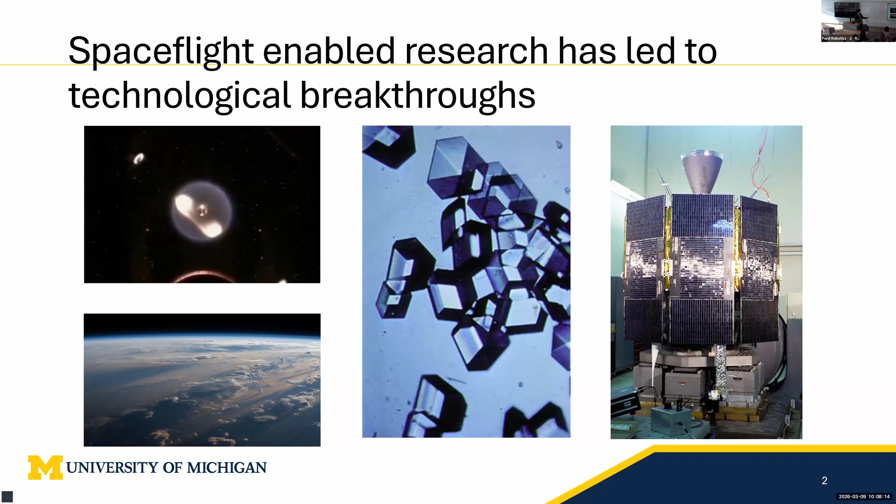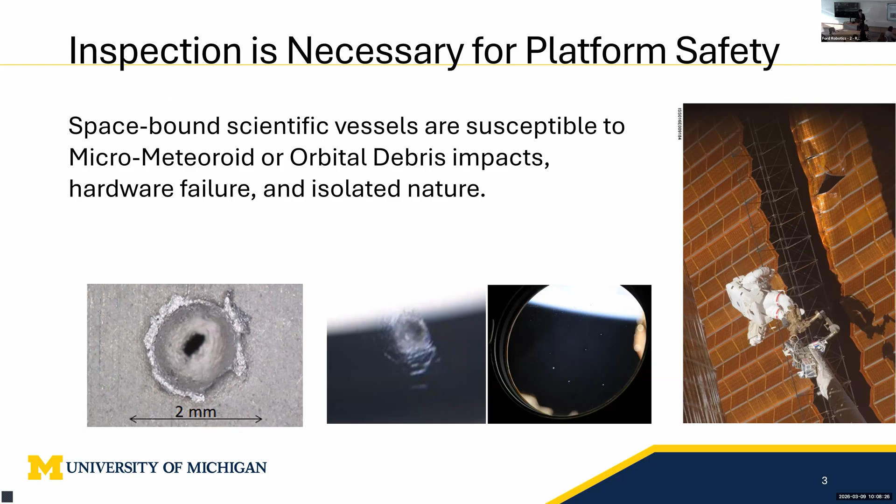All of these would not have been possible without spaceflight, which relies on space vehicles like the International Space Station or satellites like GPS satellites. Space vehicles that support these breakthroughs require inspection and maintenance because of the risk of micrometeoroid or orbital debris impacts, hardware failure, and also just the isolated nature of space.

Current inspection practices, including exterior cameras, line of sight through the windows, and manipulators, all have blind spots. You can see an example of that on the right; the shaded brown regions are blind spots. So inspection thoroughness actually requires spacewalks, which is a risk to astronaut safety.

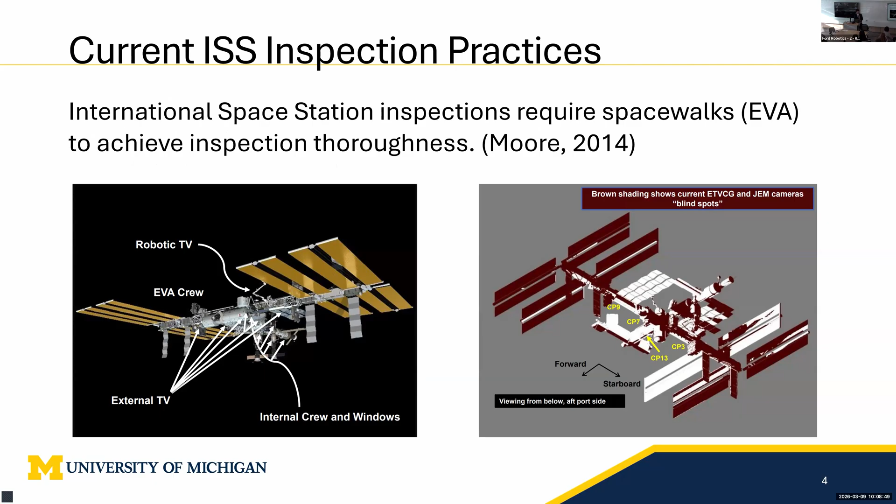One way that NASA performs risk analysis is by ranking events by criticality. Criticality is a combination of probability and consequence scales, and the highest criticality events have the highest probability and highest consequence scale. Any events in the yellow or red squares are high priority.

Spacewalk inspections for damage detection often show up in the bottom right-hand corner: low probability but high consequence events. But this risks astronaut safety. So we ask the question: can we mitigate these low probability and high consequence events using a space robot instead?

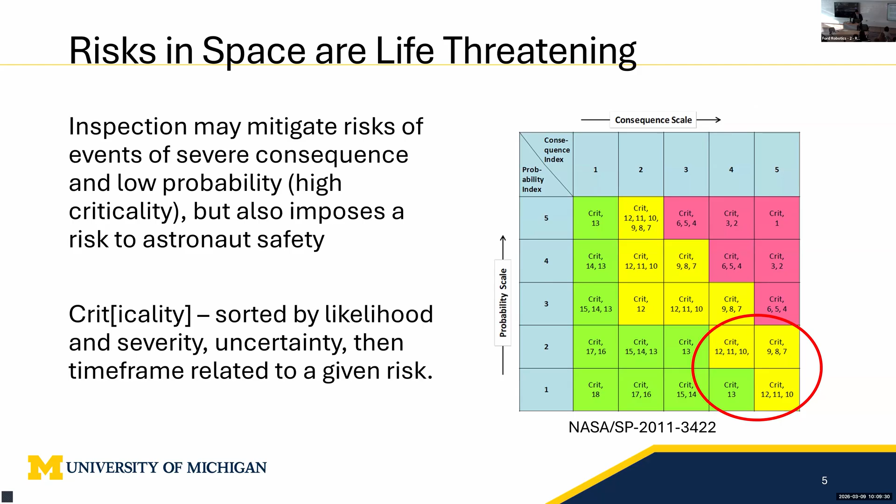Free-flying robotic inspection of the International Space Station can enable the inspection of these blind spots. But current approaches don't optimize for fuel consumption, information gain, or are limited to rendezvous docking scenarios.

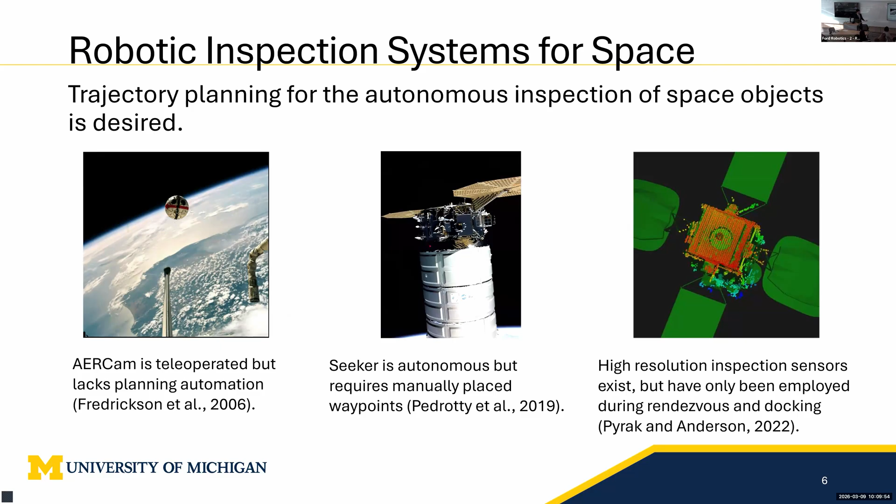Generalized inspections for proximity operations require very complex collision avoidance constraints and are not quite this simple. We also shouldn't automate every part of the inspection.

Perception algorithms for anomaly detection might propose spurious false positives, shown on the left, or do not identify untrained edge cases, like cables being identified as cracks on the right. So the segmentation task is not perfect, and identifying anomalies is even harder. So like astronaut spacewalks, we still need a human in the loop who will help identify anomalies.

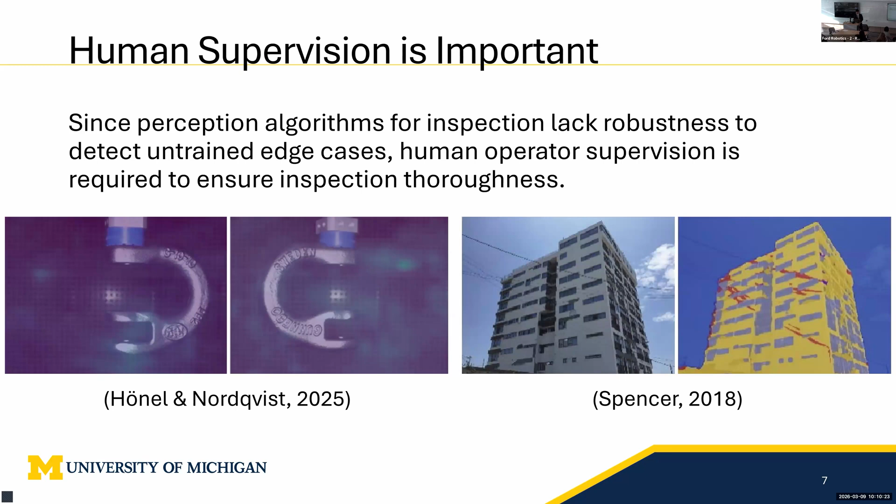This is my problem statement slide, and I'm making two key points: one, that robotic space inspection of the space station can reduce astronaut risk; two, that the system must integrate human supervision when possible for identifying anomalies. So how might we incorporate automation that optimizes for fuel consumption and information gain while also integrating a human in the loop to provide anomaly detection capabilities?

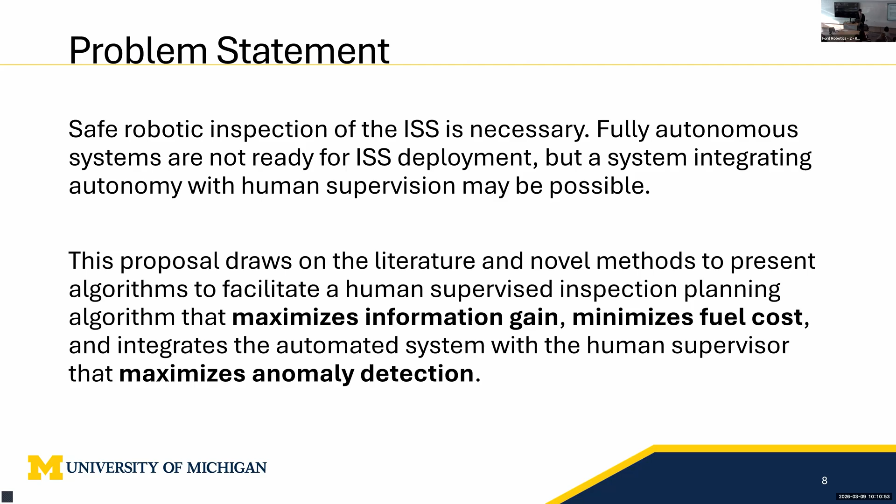Our approach begins by adapting a point-to-point robotic path planner to zero-gravity environments. Then we adapt terrestrial inspection algorithms to an in-orbit space station environment in a way that integrates results from the point-to-point planner we've already adapted. Finally, we integrate a human into the loop for anomaly detection and perform evaluations on that system.

My work makes a couple of assumptions. We assume that the inspector has perfect control, has perfect localization, and is a point mass, convenient. We assume that all the obstacles are static and known. We also assume linearized Clohessy-Wiltshire dynamics to describe the motion of the space robot.

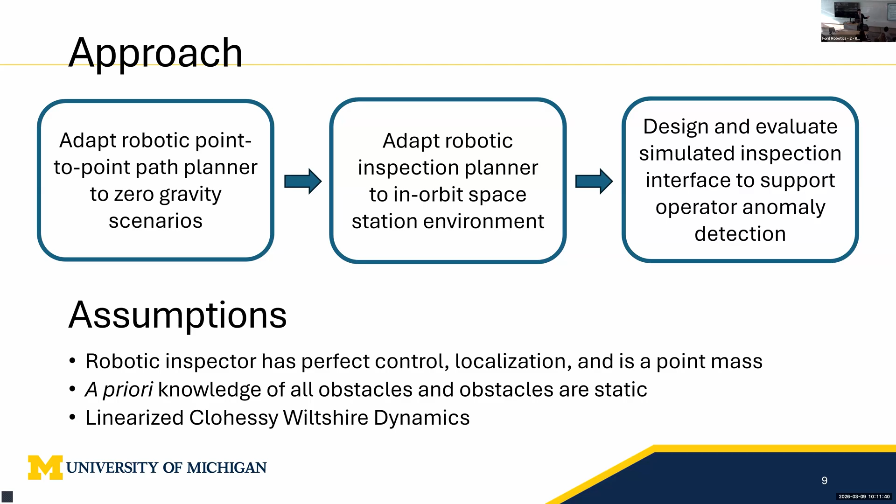This outline describes the structure of the rest of my presentation. I'll be coming back to this, but we'll start with the literature review of the gaps, beginning with a focus on terrestrial inspection algorithms.

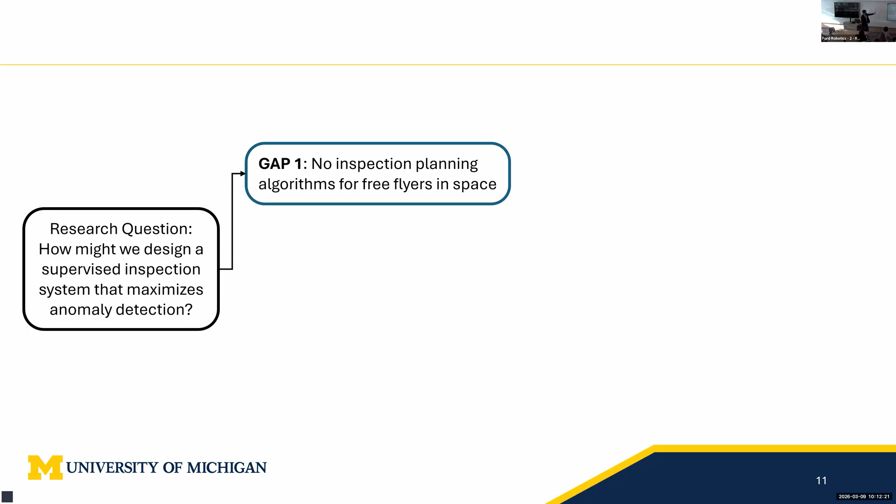So to answer this research question we posed earlier, we begin with our first gap. I stated briefly earlier that there aren't any inspection planning algorithms for free flyers in space that maximize information gain, minimize fuel consumption, while also integrating a human into the loop. This gap reflects that. I'll return to this slide and build out a flow chart that connects the research question to gaps, as well as aims, which correspond to chapters in my thesis.

The problem we're focusing on is generating a trajectory with minimal fuel cost while also maximizing inspection coverage. This comes with two challenges. First, each of these objectives is very nonlinear when considering occlusions, collision avoidance, complex geometry, and robot dynamics. Secondly, these objectives directly compete with one another. If we reduce the fuel cost of a trajectory, we might have to sacrifice some inspection coverage, and if we increase the inspection coverage, we'll probably be sacrificing fuel consumption.

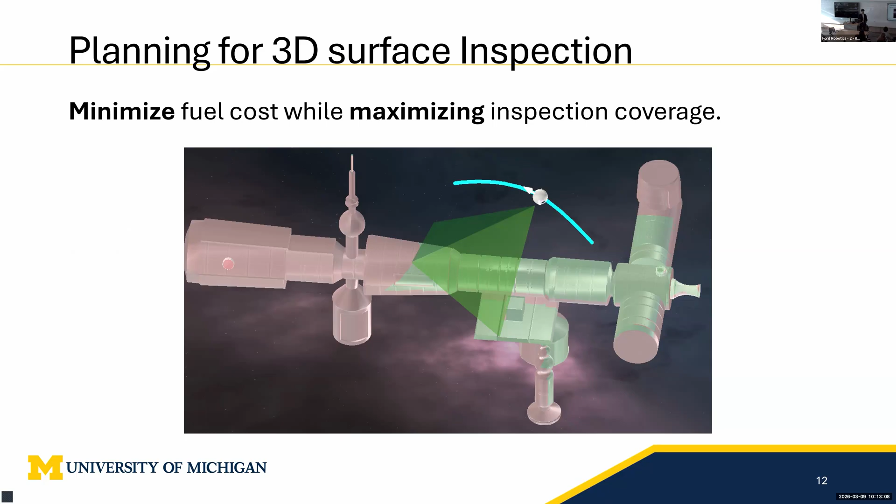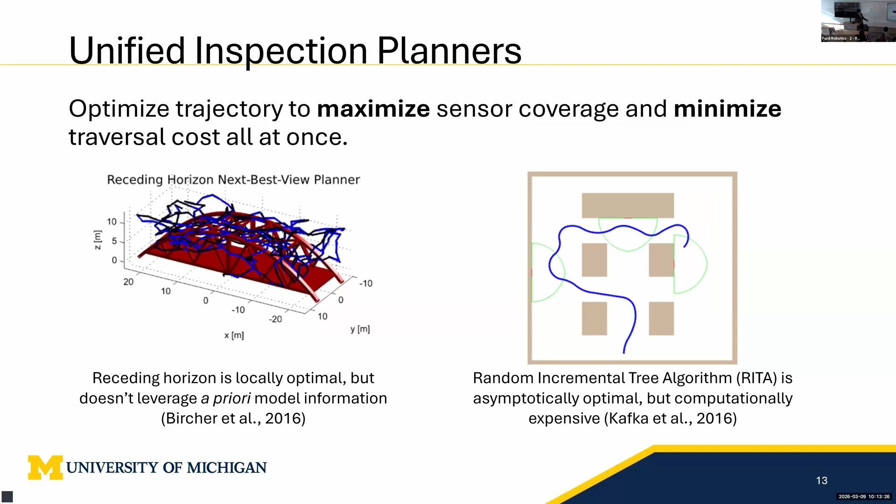This leads to two classes of planner: a unified planner and a decoupled planner. Unified planners optimize sensor coverage and traversal cost jointly. This operation is very high cost, and solutions are usually limited to a receding horizon planner, as you can see on the left, or a low dimensional or simplified planning space on the right. Both unified and decoupled approaches somehow discretize the solution space, but when you decouple the problem and provide an optimal solution to each subproblem, we can provide a great balance between discretization and optimal solution potential.

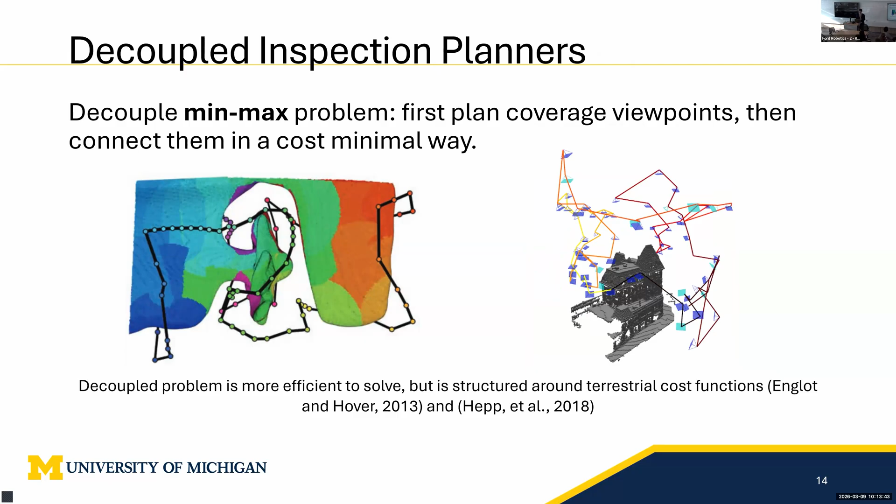This leads me to my first aim, which is adapting terrestrial inspection algorithms to space while accounting for orbital dynamics.

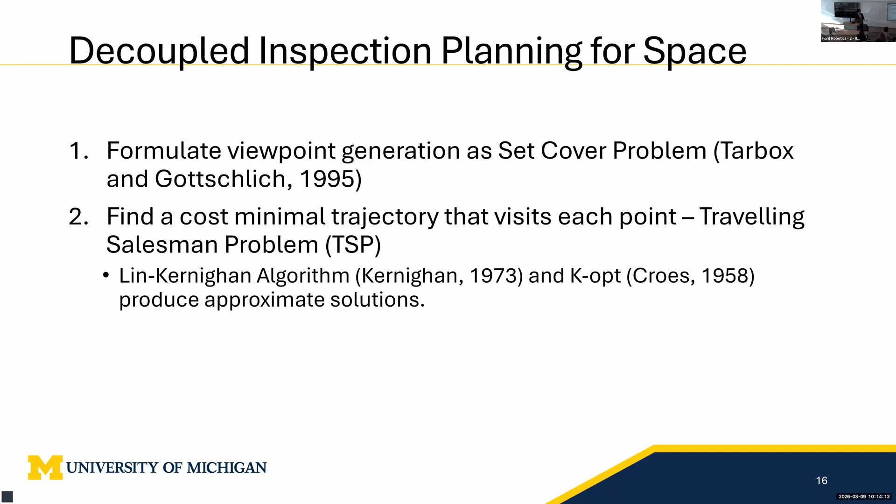Returning to the decoupled inspection problem, a generalization first solves the set cover problem, which is a formulation of the viewpoint planning problem, then adapts the viewpoint, then solves for a cost minimal trajectory that visits all the viewpoints using the traveling salesman problem. However, this leads to a non-metric traveling salesman problem, where we need to incorporate frictionless dynamics while avoiding obstacles.

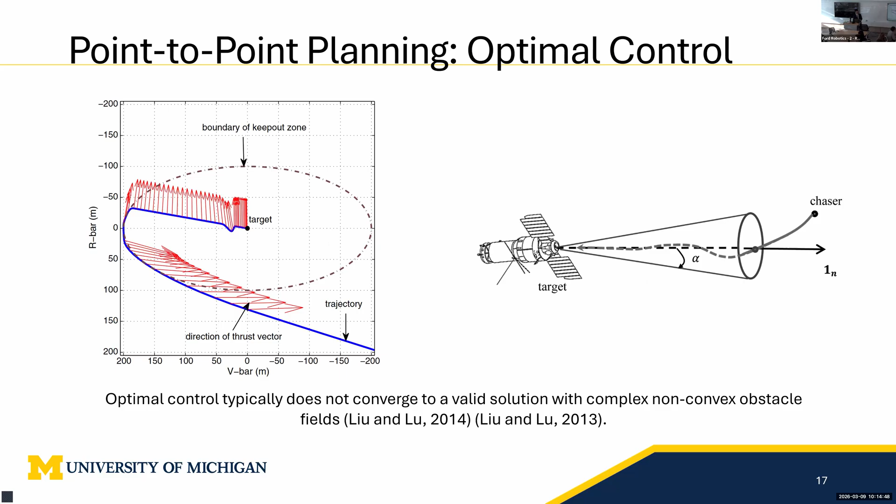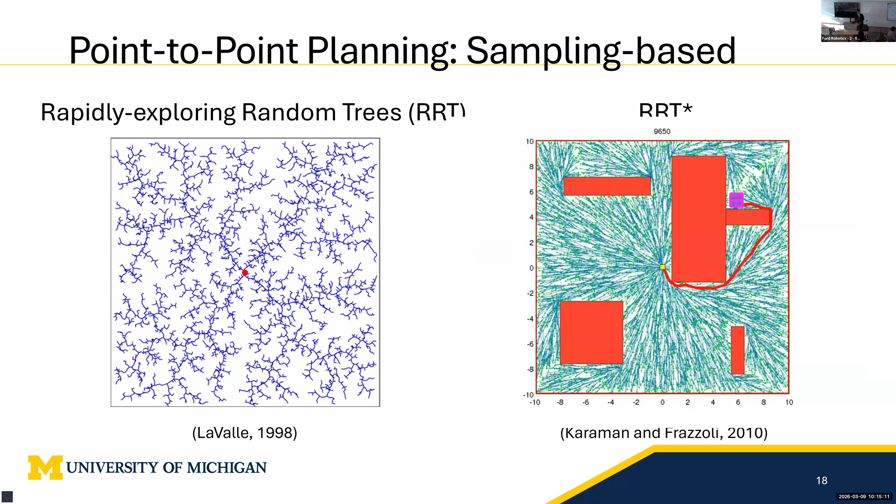Optimal control can be used to find solutions to these complex space planning problems, but they often struggle to converge to a valid solution given complex and non-convex obstacle fields. Sampling-based robotic path planners, on the other hand, like rapidly exploring random trees, also known as RRT, find solutions by expanding through free space with collision-free edges to find a path from a start configuration to a goal configuration. This leads to our first sub-aim, aim 1A: adapting point-to-point robotic path planners to the space environment.

Returning to this decoupled inspection planning slide, once we have our set of ordered viewpoints that the traveling salesman problem gives us, we have to perform one more step. In terrestrial inspection, a quadcopter can follow a set of ordered viewpoints easily because it's cheap to stop, hover, and take a picture. But in space, we have very high velocity nulling costs when we introduce orbital dynamics and the frictionless nature of space. So we have to process this set of ordered viewpoints into a feasible and fuel optimal trajectory.

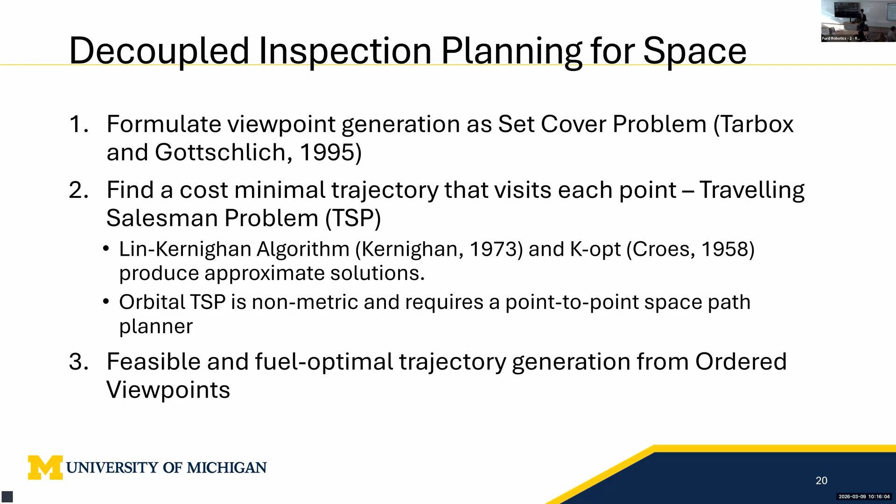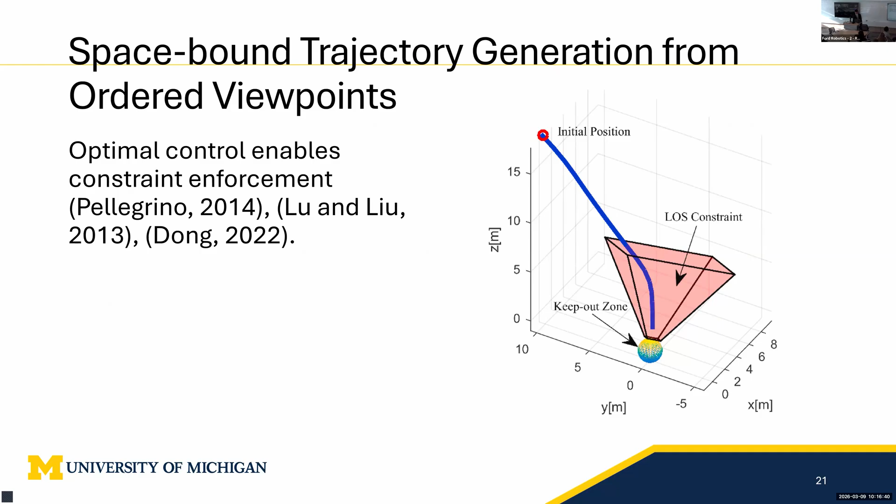So we look to the optimal control literature and find that it can support fuel consumption optimization, imposing control saturation constraints according to robot kinematics and thrust capabilities, and collision-free motion guaranteed by safe region constraints. Optimal control ends up being the best candidate for final trajectory generation, given this structured problem where we have a set of ordered viewpoints to follow. This leads to aim 1B, which is designing this trajectory generation algorithm in a way that minimizes fuel cost, maximizes coverage, as well as avoiding collisions.

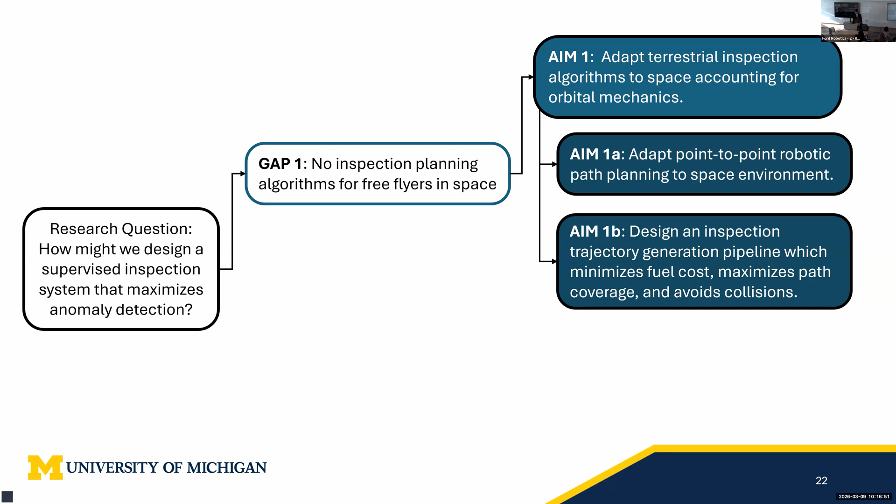I'll now move on to my second gap in the literature, which focuses on human supervision of the automation. Earlier, we mentioned that human judgment in the inspection system is vital. Previous work showed that allowing a human to take over control, also known as human in the loop, increased or improved anomaly detection. However, in this previous work, participants did not prioritize fuel use, and the study didn't consider three-dimensional coverage and fuel optimized paths.

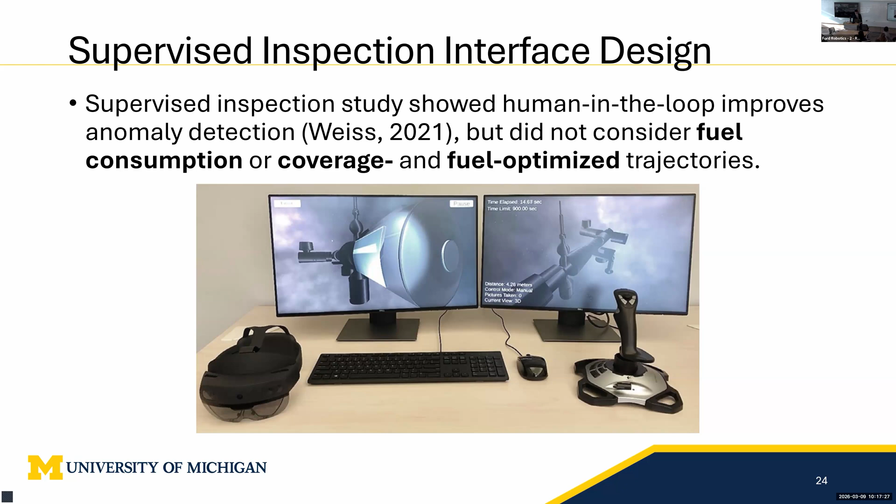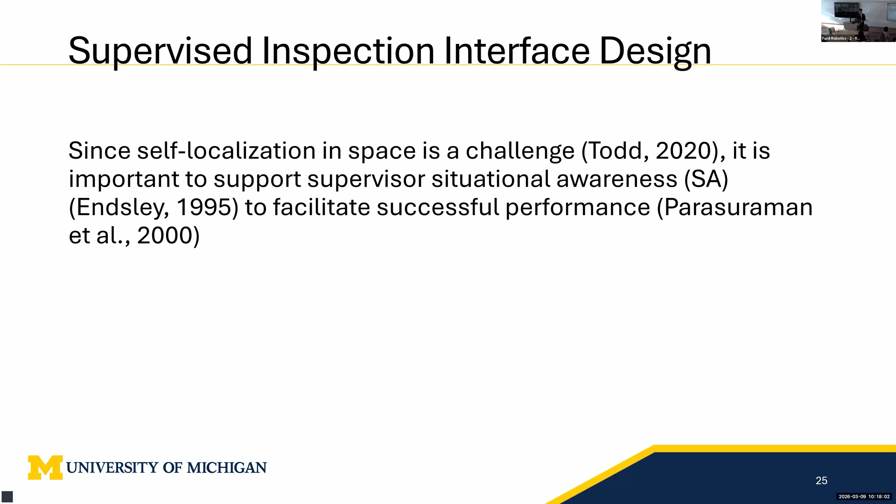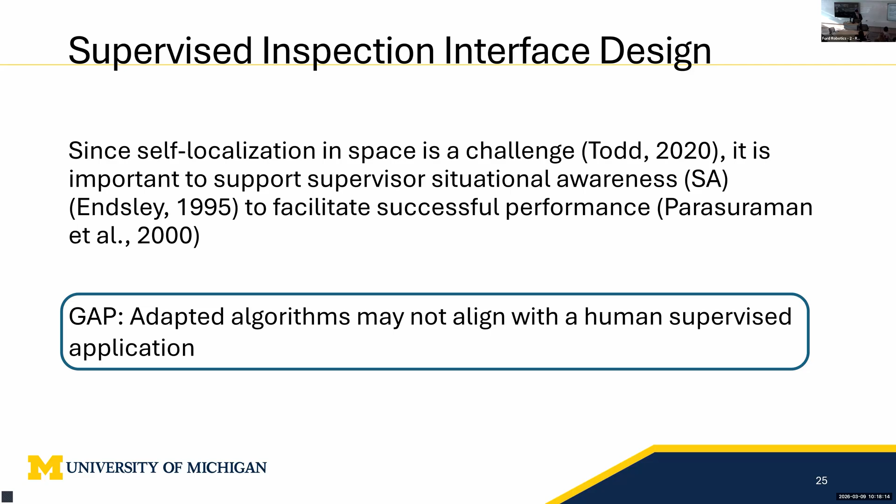Human in the loop design, especially in space, is very challenging for the following reasons. Since self-localizing in a 3D environment involves 6 degrees of freedom—3 in translation, 3 in rotation—self-localization in space is very challenging. Adding the influence of invisible orbital dynamics makes this task even harder, near impossible. Ensuring that the human operator maintains situation awareness throughout the inspection task is very challenging. This leads us to our second gap: any algorithms that we adapt may not align with a human supervised application. I'll populate this gap on the slide.

Human studies show that path curvature and vehicle heading influence an operator's ability to determine the goal state of an autonomous docking vehicle in space. We also know that fuel-efficient trajectories for proximity operations, especially in this inspection scenario, lead to paths that have many loops, as you can see on the right.

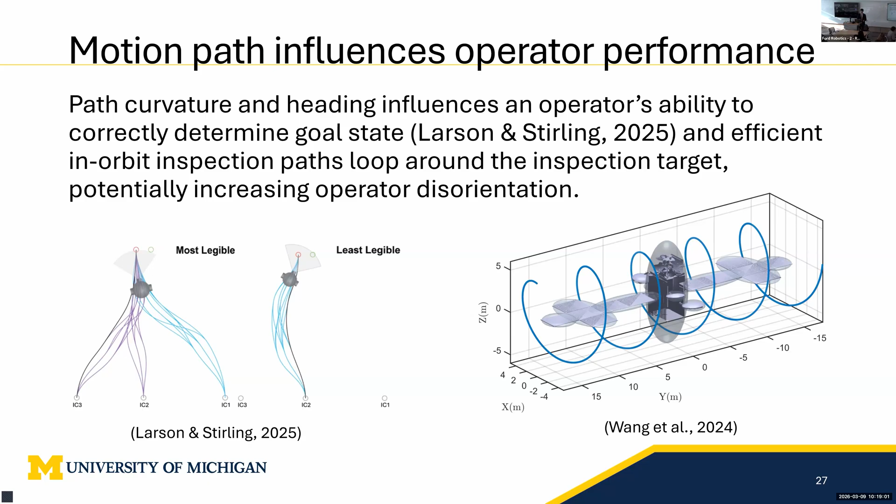This has the possibility of disorienting the operator, since we're constantly changing orientation and looping around the space structure. So designing motion plans that support human operator situation awareness is really important and may influence inspection performance. This leads us to our second aim, which is investigating the influence of the motion plan as well as

takeover modality presence on operator inspection performance for the inspection planner that we've created in aim 1. This leads us to our first technical chapter, and this technical chapter will address aim 1A, adapting the point-to-point robotic path planner to the space environment. This chapter and this aim led to 2 publications, one in IEEE Aerospace and one in AIAA, the Journal of Spacecraft and Rockets.

In this aim, we created a sampling-based planner for zero gravity that leveraged the RRT structure. This is the planner I mentioned before. Because moving in straight lines in space is very fuel efficient, we can swap the traditional concept of edges and nodes in the RRT tree structure to reduce the cumulative change in velocity heading. This is also a first step in proximity operations, so we don't end up modeling any gravitational fields. We assume zero gravity.

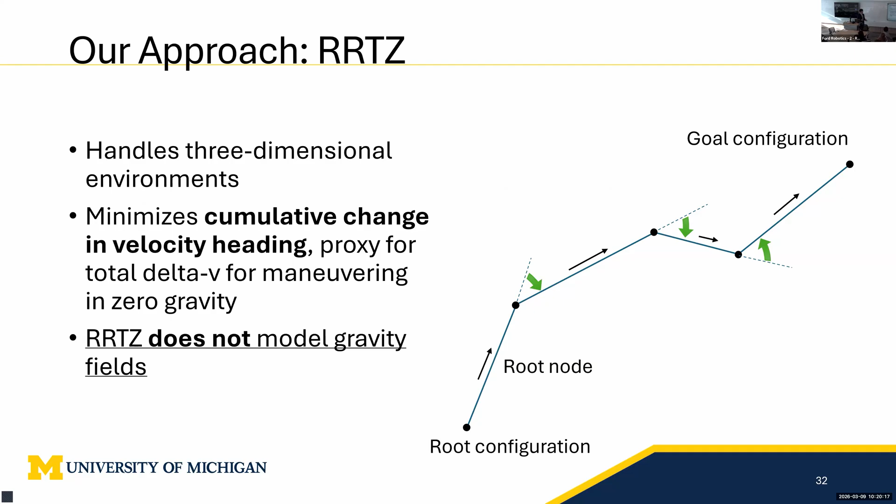In this tree, we retain the concept of a node-based tree, but allow nodes to represent straight line segments and edges to represent the intersections between them. But we need to randomly generate new lines that will intersect with the tree that we already have in order to expand it towards the goal state. I'll show you how we do that.

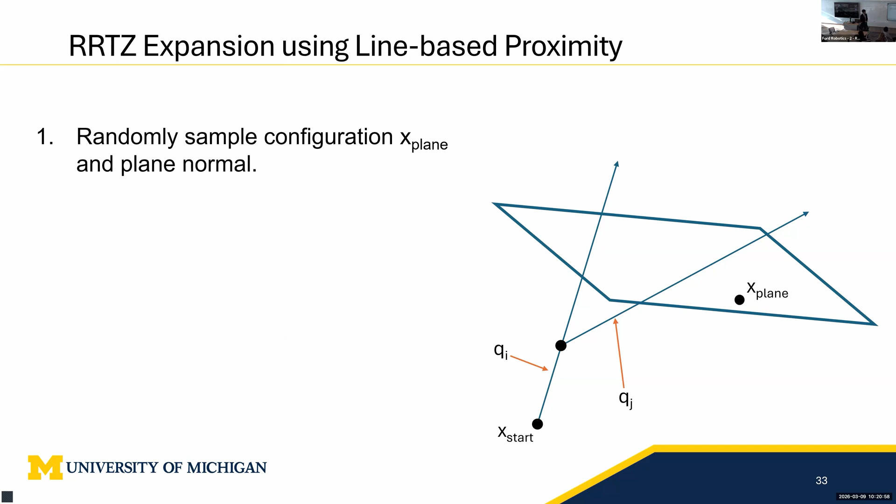First, let's say we have a tree on the right side, has 2 nodes, Qi and Qj. We begin by sampling a random configuration called x-plane and a random unit vector that will describe the plane that intersects x-plane. Next, we find all the intersections between this plane and the existing tree nodes. We then generate candidate nodes that connect these intersection points to that point on the plane, x-plane. We evaluate the cost it will take in terms of cumulative velocity heading change to get from the start node, x start, all the way to x plane through each intersection point.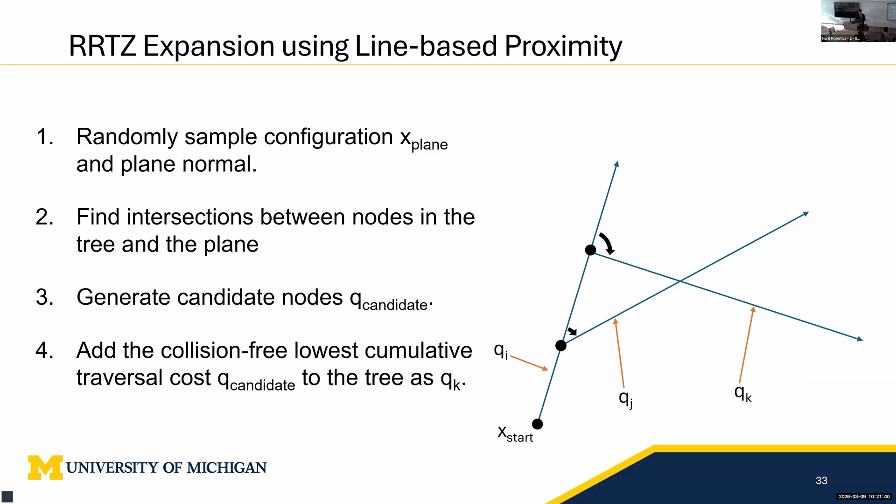Once we've found the candidate node that results in the lowest cumulative velocity heading change, we add it to the tree. And then we repeat this until we are able to sample the goal node and connect it into the tree.

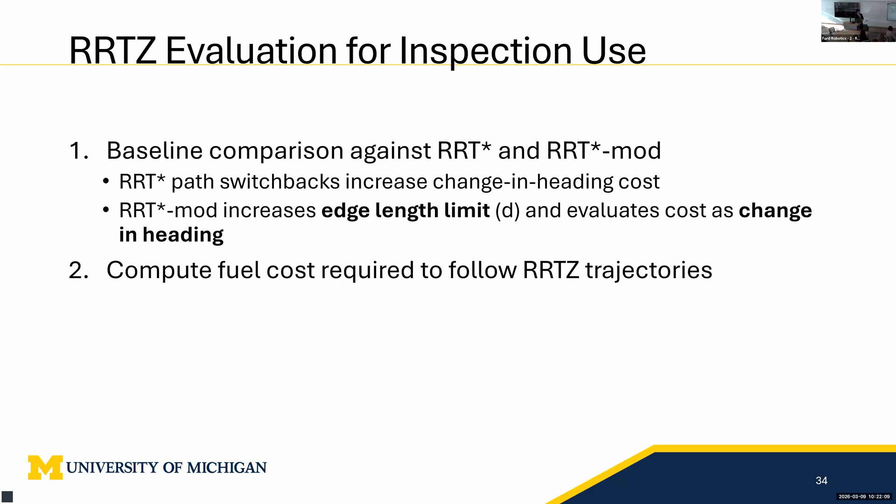So we evaluated RRTZ by comparing it against RRT star and a modified version of RRT star called RRT star mod, which modifies the edge length limit and modifies the cost heuristic to the change in heading cost heuristic. After we compare it to RRT star and RRT star mod, we also take RRTZ trajectories and evaluate the fuel cost to follow these trajectories when in a gravity field.

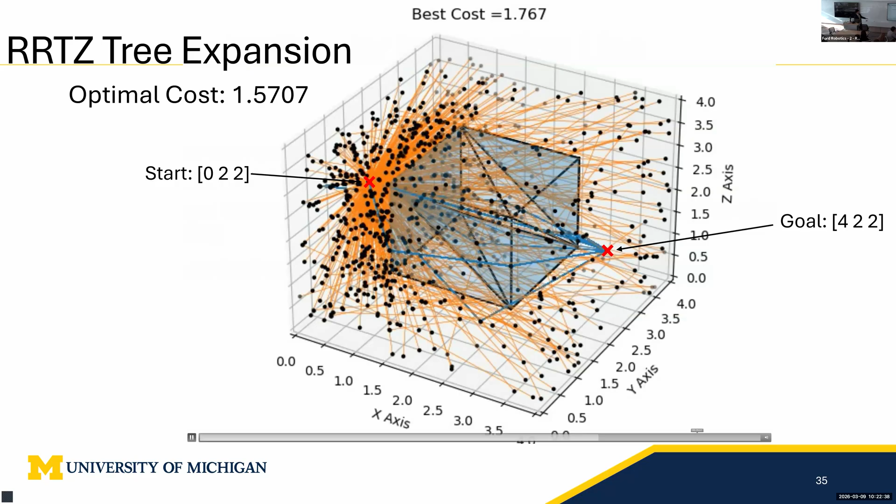This is an example of what RRTZ looks like when it's expanding from a start node 022 to a goal node 422 while avoiding obstacles. I've added dots to the end of each ray to visualize the intersections between the edges and the environmental constraints as well. As you can see, the cost is slowly converging towards the optimal cost, to the end.

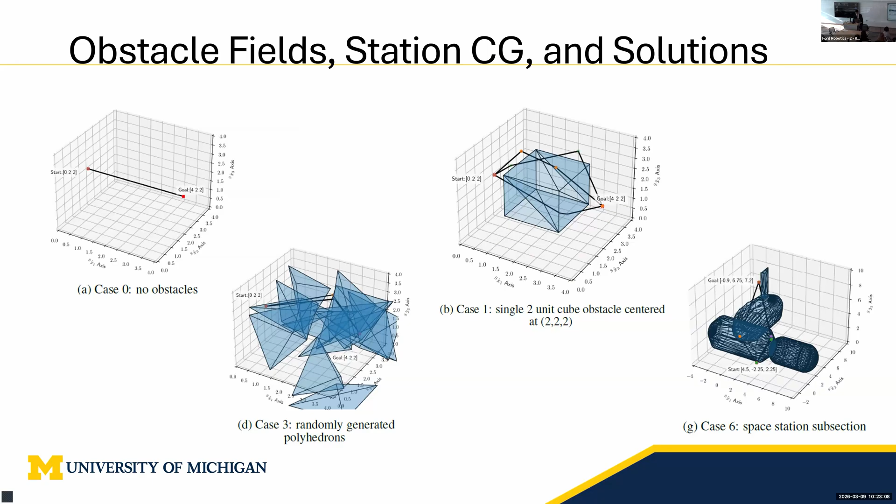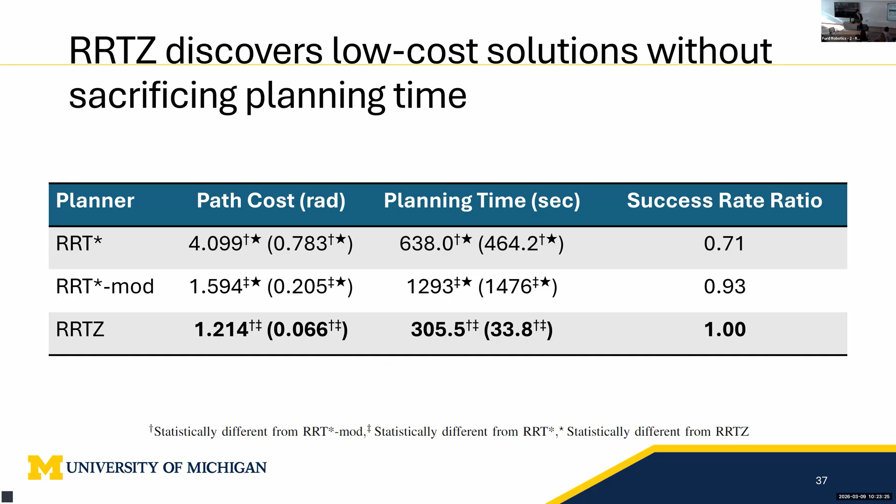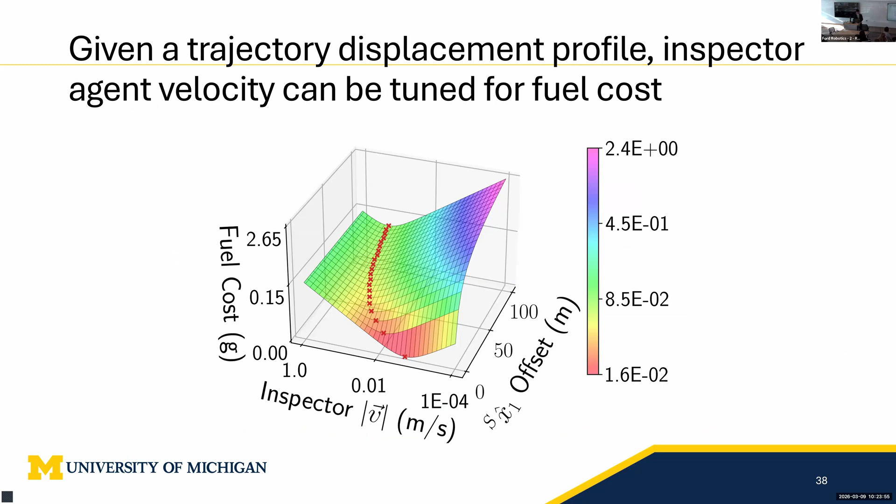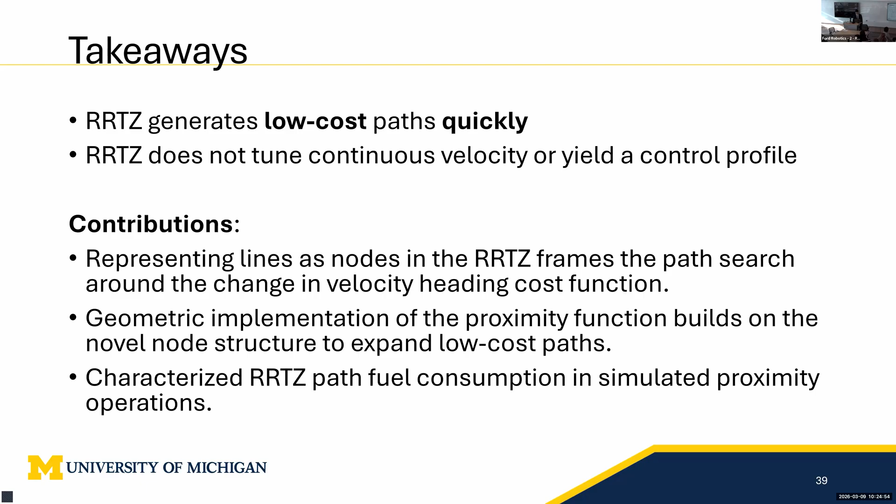Next, we'll move on to Chapter 2, Inspection Trajectory Generation, and this chapter corresponds with Aim 1B. This work also resulted in 1 publication in RAL, which I'll be presenting at ICRA this summer.

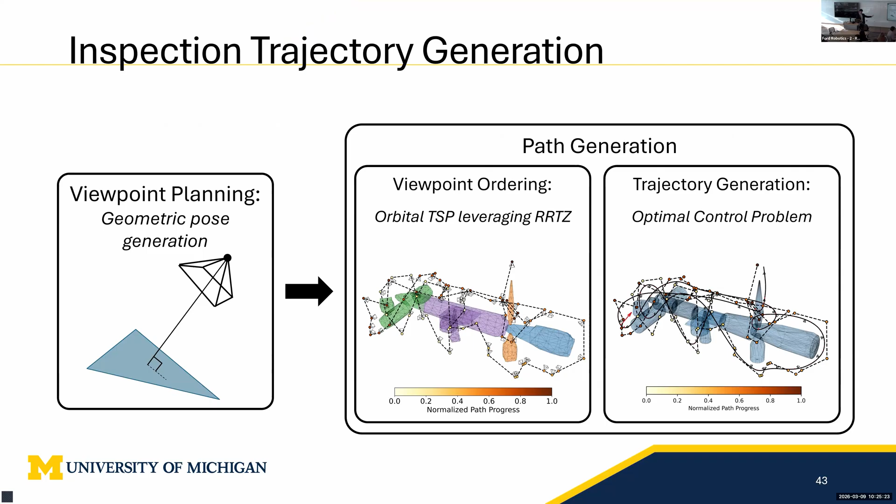The inspection trajectory generation pipeline consists of 3 modules: first, a viewpoint planning module, then a viewpoint ordering module, and then trajectory generation. The viewpoint planning module takes in a triangle mesh that describes the object we're trying to inspect, and yields a set of coverage viewpoints. The viewpoint ordering algorithm takes in that set of coverage viewpoints and yields an order to follow them. The trajectory generator formulates an optimal control problem to solve for a trajectory, which we're calling X, that is fuel and coverage optimized.

First, in the viewpoint planning algorithm, we know that it's a well-studied topic in the literature, so we've borrowed triangle mesh-based pose generation and submodular maximization to solve the viewpoint downsampling problem.

Next, in the viewpoint ordering problem, we leverage the traveling salesman formulation or methodology, but we extend it to include orbital mechanics. Let me show you how we do that.

So this is the same problem I mentioned earlier. The orbital traveling salesman problem is non-metric and asymmetric because fuel consumed between any two viewpoints depends on which viewpoint was traversed beforehand. Let A, B, C, and D be different viewpoints we're trying to traverse between. We're trying to start at A, then go to B, and then end up at C somehow. But which viewpoint do we go through between B and C, E or D? According to the Euclidean metric cost, going through E is actually shorter than going through D.

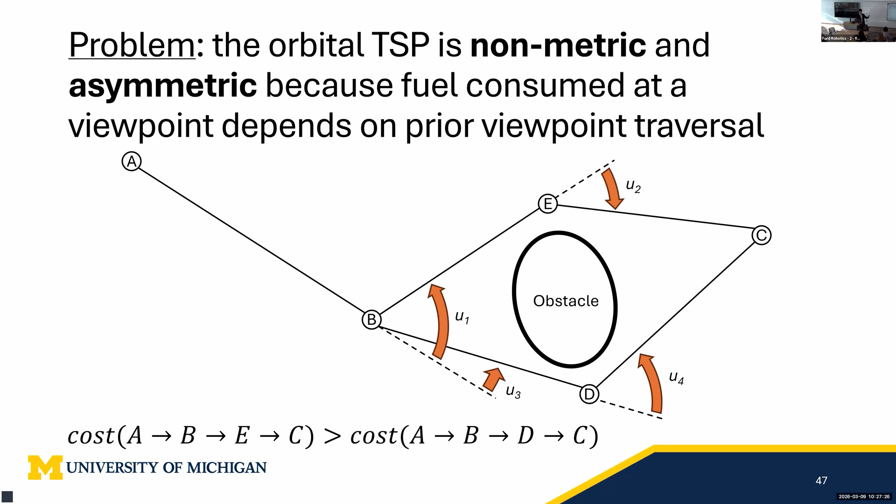So our solution is to propose orbital traveling salesman problem solutions using the 2-opt method, then evaluate solution quality based on this velocity heading change metric, and choose improvements to existing solutions from the 2-opt method.

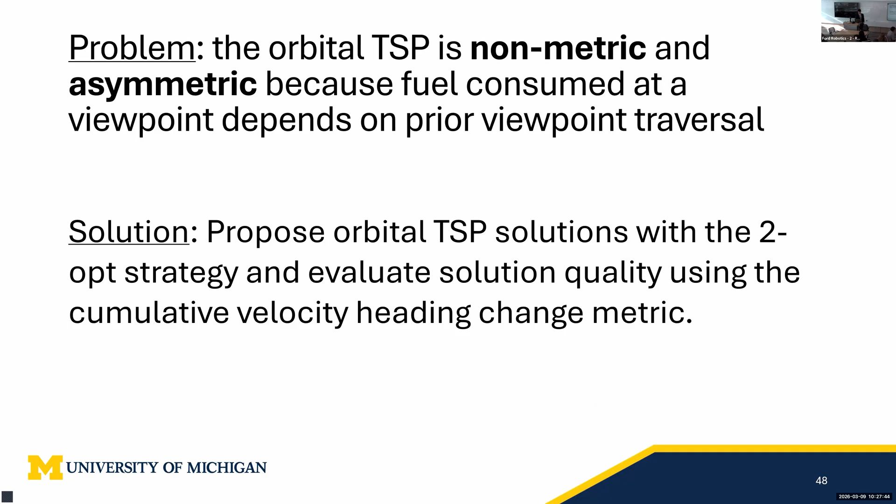Moving on to the final module, trajectory generation. In this module, we are able to generate a useful trajectory for the robot, which we're calling X, by optimizing an objective function f of x and u.

This has two normalized terms that are weighted to control their influence on the solution. The left term is our fuel consumption term, and the right term is our summed viewpoint proximity to the ordered set of coverage viewpoints.

U sub i is thrust at time step i, G0 is acceleration due to gravity, ISP is the specific impulse of the cold gas thrusters we're simulating on the inspection robot. NT is the number of time steps in our trajectory state vector, and N-knot is the size of our coverage viewpoints set. Y sub i of X selects the closest state X-hat to Q sub i in a pre-specified range. F1-hat and F2-hat are normalization factors that equally balance each of these terms when W is set to 0.5.

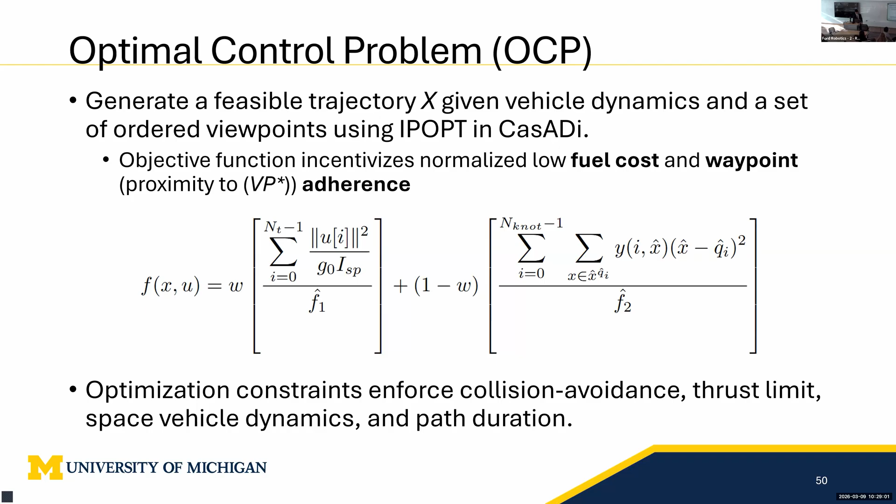On the next slide, I'll show how we tune W. We tune W by using a Pareto front.

Let me explain this chart first. This chart shows each solution to the optimal control problem from a unique W. We've connected all the solutions that are optimal with respect to fuel cost or missed coverage, shown in blue, and this is the Pareto front. Once we have this Pareto front, we can choose a threshold for any one of these objectives to find the best solution, or the most optimal solution with respect to the other, given that threshold.

In this case, we've chosen that we want at least 98% coverage. So we can choose the solution that gives us the least amount of fuel cost, given that we want 98% coverage, which is just below that line.

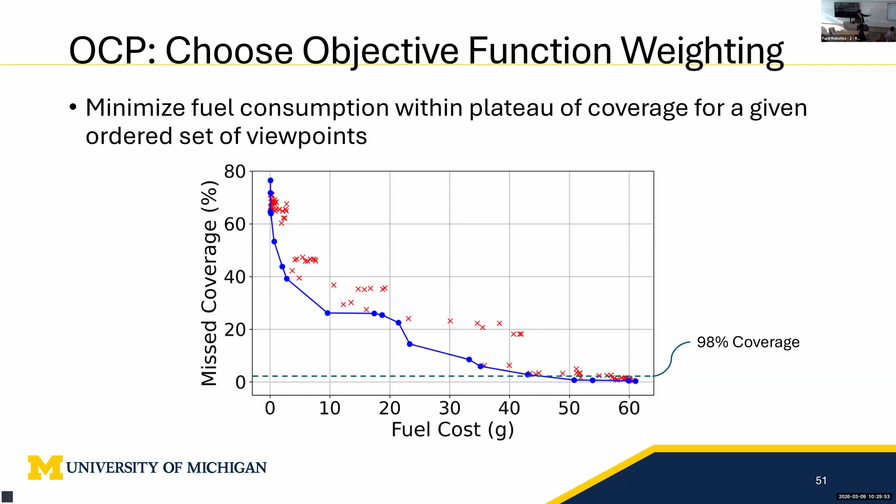So this is the result of one of these optimizations. The ordered viewpoints that we described before are the dots connected by dotted lines, and then the final solution is in black.

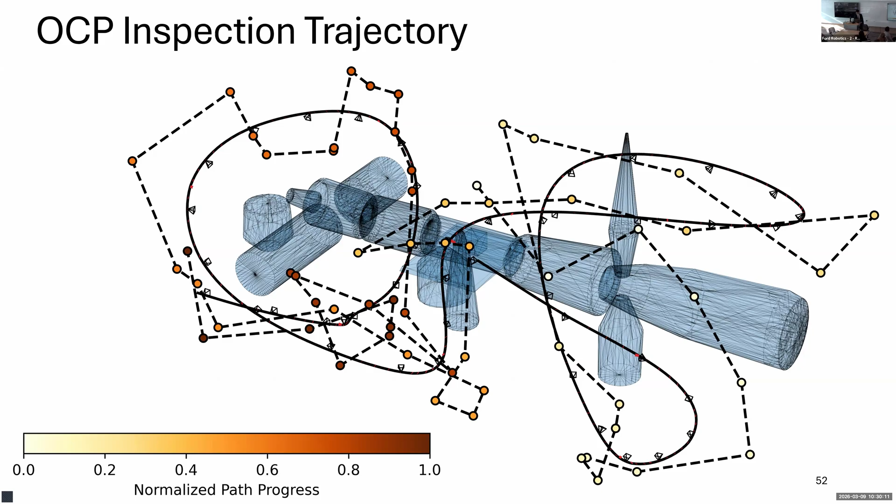From this work, we have a couple takeaways and contributions. First, we have a traveling salesman problem formulation and trajectory generation that integrates linearized orbital dynamics in these gravity fields. We also provide a waypoint incentivized Pareto front solution selection that optimizes fuel consumption and coverage.

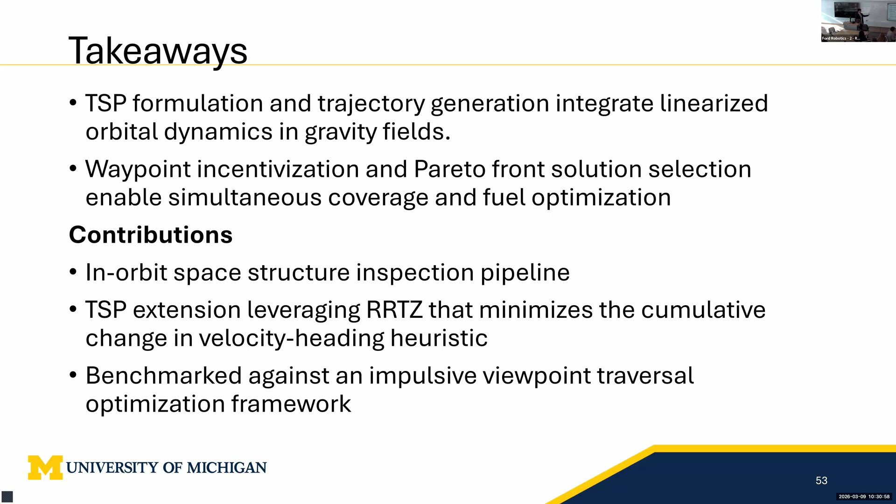And we contribute an in-orbit space structure inspection pipeline, a traveling salesman extension that leverages RRT*, and benchmark this against an impulsive viewpoint traversal optimization framework. That last point is something we didn't have time to include in this presentation, but it's in the paper if you want to read more about it.

So next I'll go over chapter 3, evaluating human automated teaming for supervised inspection. This chapter focuses on our second aim, where we integrate human in the loop and evaluate if motion path and takeover presence influences the inspection performance of that human. This uses the adapted inspection algorithm that we formulated in aim 1.

We don't have any current publications. We're still writing those up and submitting, so hang tight.

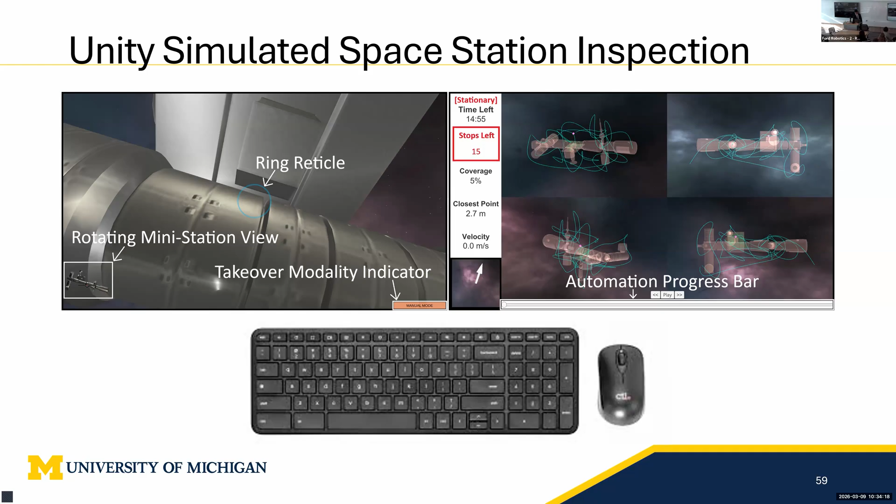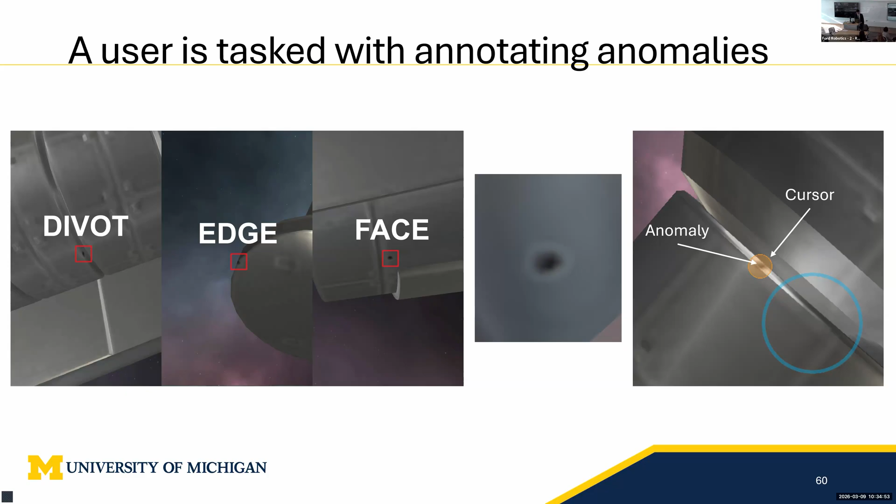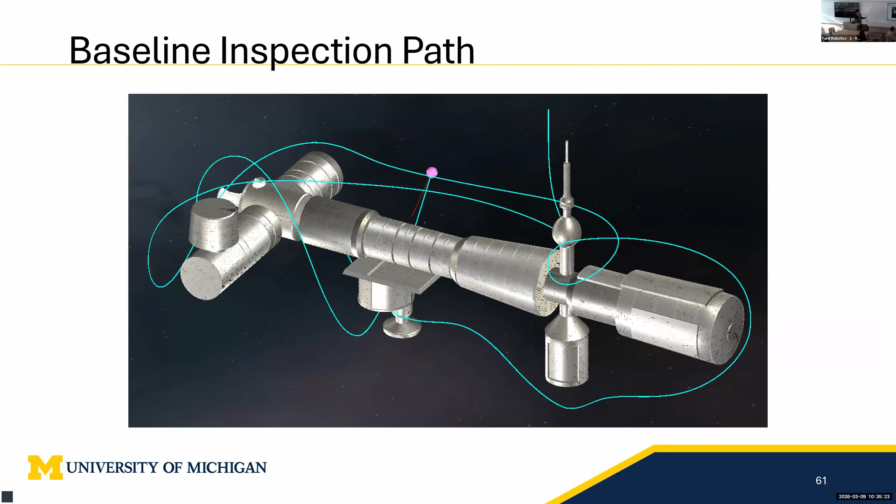And so we added a constraint called the local constraint, which inspects one module of the space station at a time. This allows participants to only need to think about one module at a time in terms of inspection. What have they inspected? What haven't they inspected? And then move on to the next.

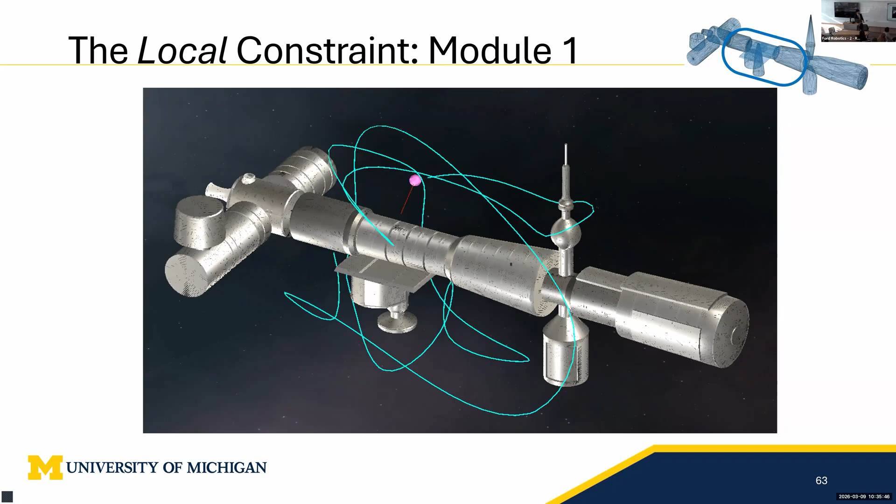You can see, I'll isolate that trajectory per module in the next few slides. This is the segment that inspects the middle module.

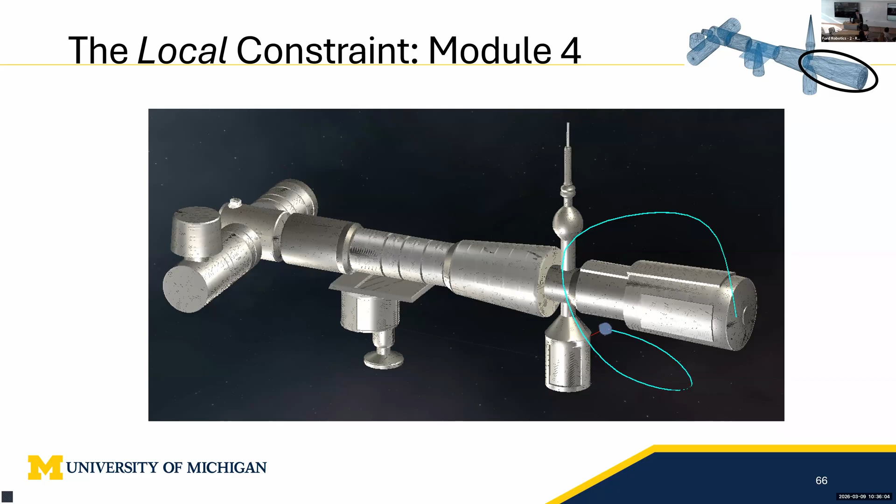Then they inspect the module on the left, and then the spire module, and then the module on the right. In addition to these two paths, participants also have the opportunity to design their own trajectory. This is what we'll be calling the custom trajectory, the custom path condition, using this interface.

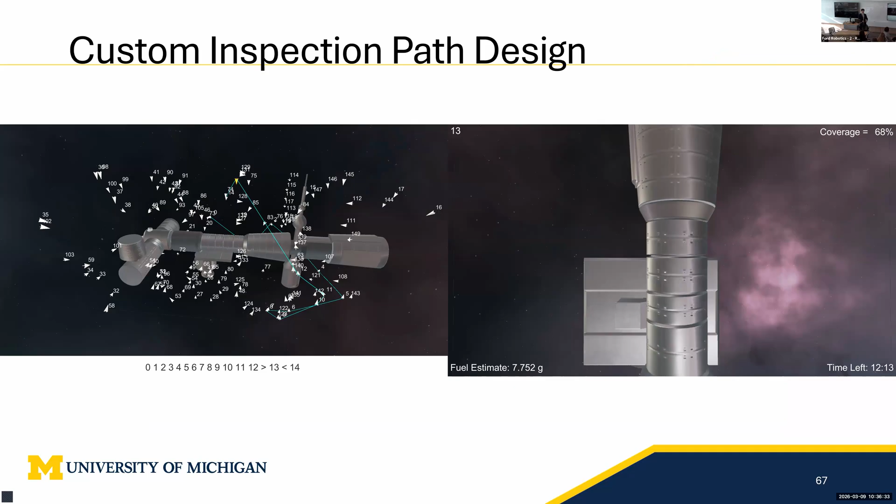So they're given a set of viewpoints, and they choose a subset of those viewpoints and order them into a set of ordered viewpoints. We give this set of ordered viewpoints to the last module of our inspection pipeline, which optimizes for fuel and yields a final trajectory that they then perform an inspection using.

So this is the overview of our study. We have two independent variables that will be modulating this: rotation-only takeover modality presence, as well as the path condition, which includes the local constraint. We have 4 performance metrics.

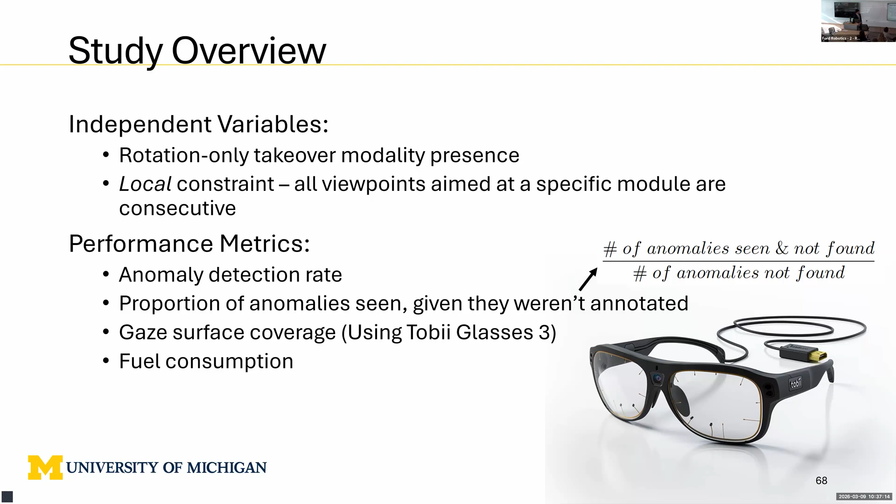First is our anomaly detection rate. Then we'll be measuring the proportion of anomalies that a participant saw, given that that anomaly wasn't annotated. You can see an equation for that on the right. We'll also be tracking the surface coverage that a person inspects on the space station using these Tobii glasses. We'll also be tracking the fuel consumption of each inspection.

We have a couple of hypotheses for this study. First, that the local constraint and takeover ability will increase anomaly detection percentage, coverage percentage, and fuel consumption. We also hypothesize that anomaly detection percentage, coverage percentage, and fuel consumption will all have positive correlations.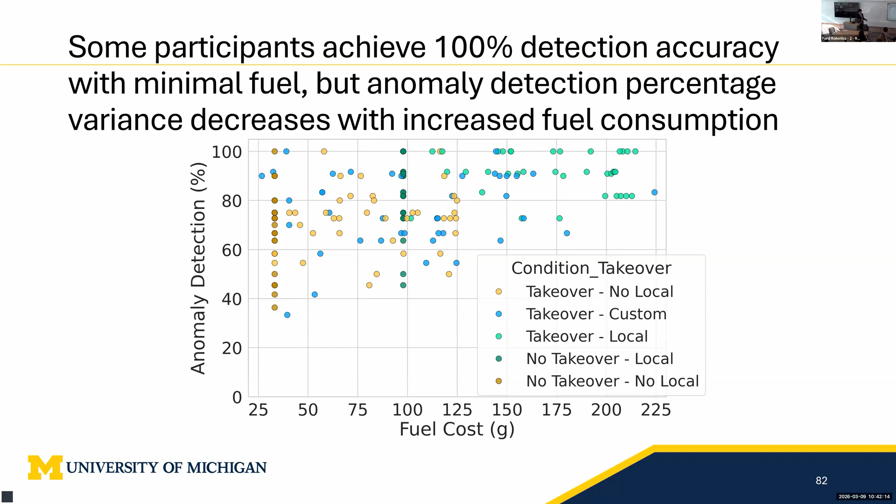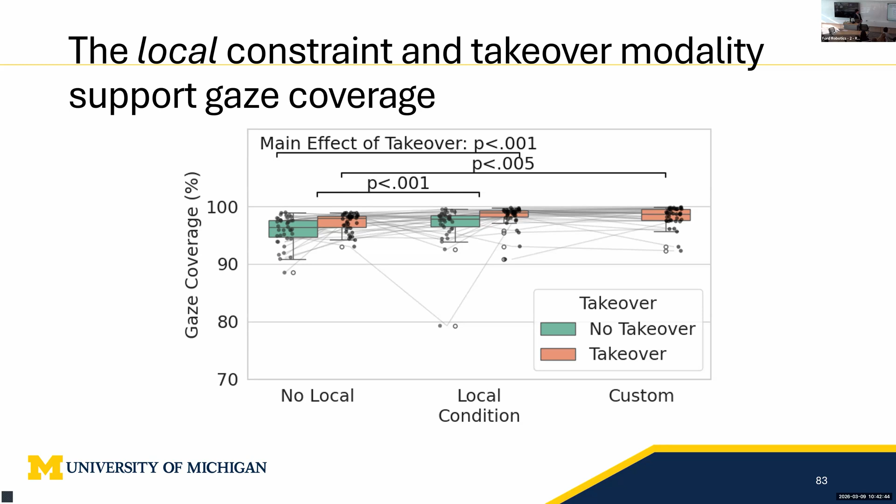These are the gaze surface coverage results. Let me describe the graph: on the left you see gaze coverage percentage, and on the bottom you see our different conditions. We see that the local constraint and takeover modality being present increase gaze coverage, or the percentage of the station that someone has looked at across a trial.

This graph on the right shows us the equation I showed before, the proportion of anomalies seen given that a participant did not annotate them. We see that the local constraint leads to a much lower proportion.

This indicates that when the local constraint is not present, people are looking at anomalies but not marking them. There are a number of reasons this might happen. There might be a failure in cognitive focus—looking at an anomaly but not actually focusing on it with their cognitive faculties, so they don't recognize it. They might also recognize it but not realize they haven't marked it before, something gets lost in the mix. Or maybe they did notice they hadn't annotated it and wanted to, but weren't able to because they needed a takeover and ran out of takeovers.

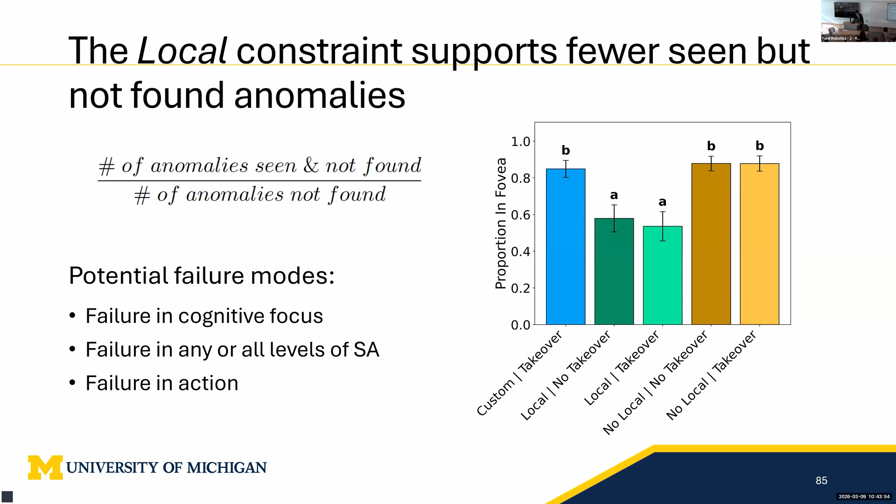A few major takeaways from this research are that the local constraint does successfully support anomaly detection, but it comes at a cost of fuel consumption. Also, people don't just mark any anomaly they're looking at.

This work also makes two major contributions. First, we create this dataset that enables investigation of the influence of motion plan trade-offs that consider human operator performance. We also created a gaze analysis pipeline that allows us to map data captured by the Tobii eye tracker, so head-mounted data, to surface coverage in the simulation.

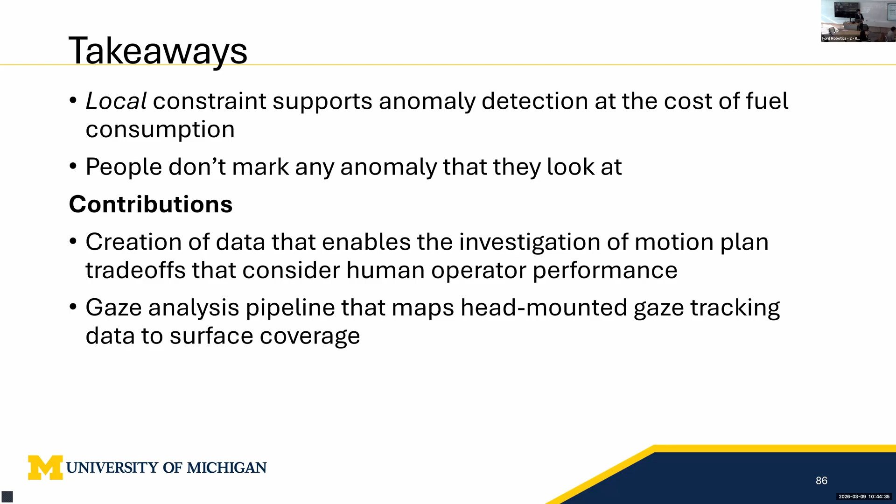This leads to my discussions and conclusions for my dissertation.

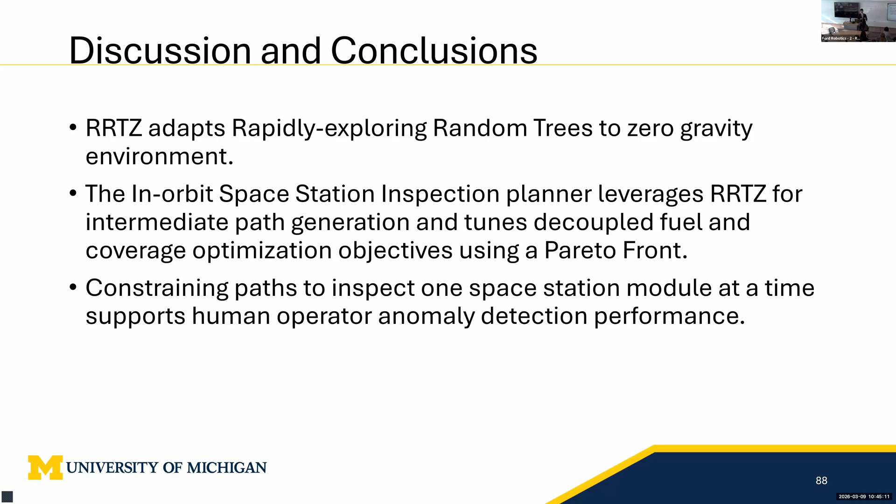We found that RRTZ successfully adapts RRTs to zero gravity environments. We also created a space station inspection planner that leverages RRTZ for intermediate path generation, and is also able to tune this decoupled fuel and coverage optimization using a Pareto front. Finally, we found that constraining paths to inspect one module at a time supported operator anomaly detection performance.

This work has led to many avenues of future work, these are just a few. We plan on analyzing more data from that human study to help contextualize the results we saw. There is also opportunity to adapt RRTZ to account for gravity fields.

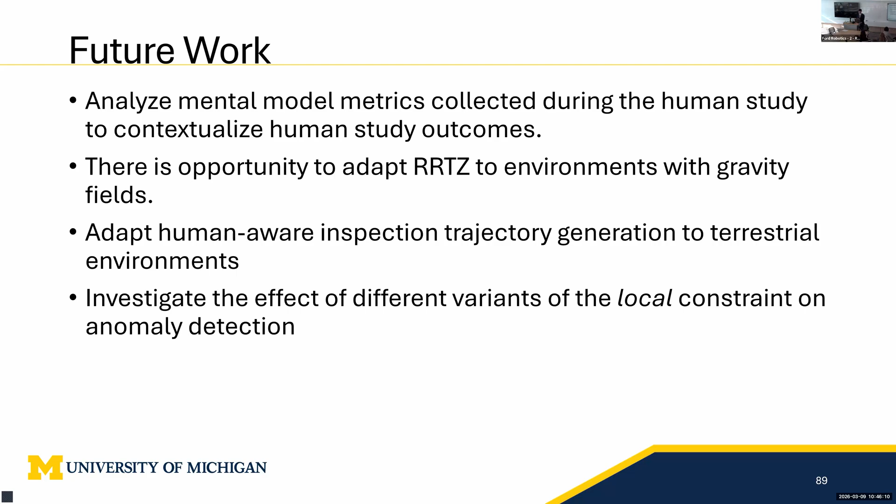There's also opportunity to adapt the human-aware inspection trajectory generation to other applications on Earth, such as quadcopter inspections or underwater ship hull inspections. We also found there's potential to investigate the effect of different variants of the local constraint on anomaly detection. We only explored one version, focusing one module at a time, but imagine there are many others.

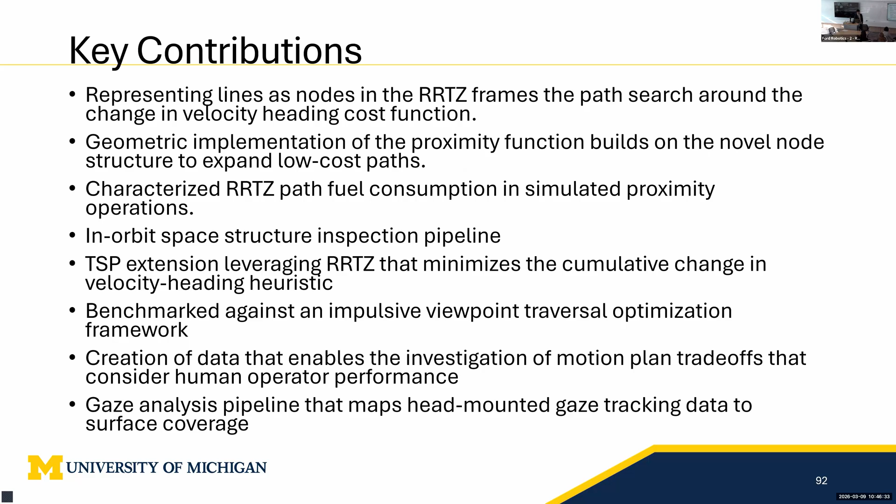Move on, finally, my acknowledgements. I'd like to thank Professor Stirling and Professor Atkins for their continued and ongoing support throughout my whole PhD. I'm very grateful. Also, I'm thankful for the A2Sys lab and the Stirling lab for always being there to critique my presentations and offer me feedback. So thank you. I'd also like to thank all my friends who have been there to support me, literally, along the way. I couldn't have made it through without you guys.

I'd also like to especially thank my partner Olivia and her family for supporting me as well. And finally, my family for always indulging me in playing football, catching, throwing, catching, and just being there as a supporting pillar. And finally, my grandfather, who could not be with us today, passed a year ago. That concludes my presentation.